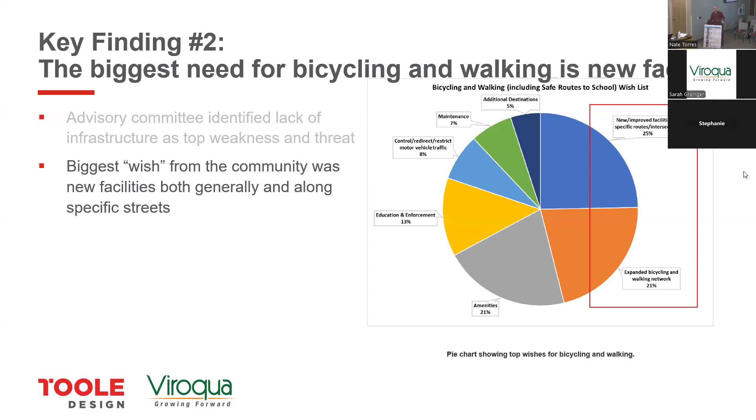At the end of the survey, we asked people if there's anything else they wanted to tell us about biking or walking. The top thing they told us is they want more facilities for biking and walking. It was just a theme you kept hearing again and again in the survey.

Out of all those conditions, earlier we saw that people thought Viroqua was great compared to other communities. That was the top rated condition. The worst rated condition was the location and number of bike racks for parking. Only about 10% of respondents said that was excellent or good in Viroqua. So there's definitely a need for new facilities, yes, but also for simple things like bike racks.

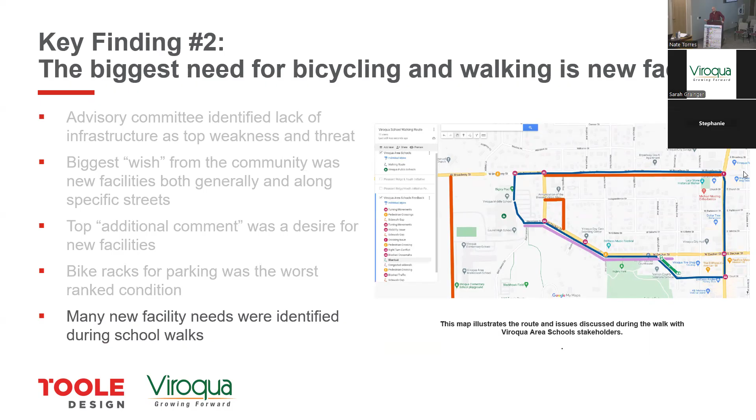When we did the school walks, these are our routes, and we heard a lot about that on the walks - just different needs of physical infrastructure that people wanted to see built. So that's number 2. Number 3, we're halfway through the key findings.

Just real quick, because sometimes this language throws me off - when you talk about a facility, can you share some examples of what a bike and pedestrian facility is? Examples would be sidewalks, trails, crosswalks, curb ramps, bike lanes. Yeah, because the word facility always throws me off - I think of facility as a building. Sure, in the transportation world, sometimes we do talk about it that way.

Even like the trails in the school areas that connect kids walking to different places, that would be part of it as well. Yeah, great - they're not always on public property necessarily. Sometimes a bike rack can be on private property if it's out of the right of way, or a school would be public property, but it's not always city property, I should have said.

The third key finding was that connections to schools, parks, and natural areas are the highest priorities for the community. A lot of times you'll hear, well, what destinations should we connect? We can't do it all - what's the most important? We asked people in the survey, and we had a map also, where people could put their points.

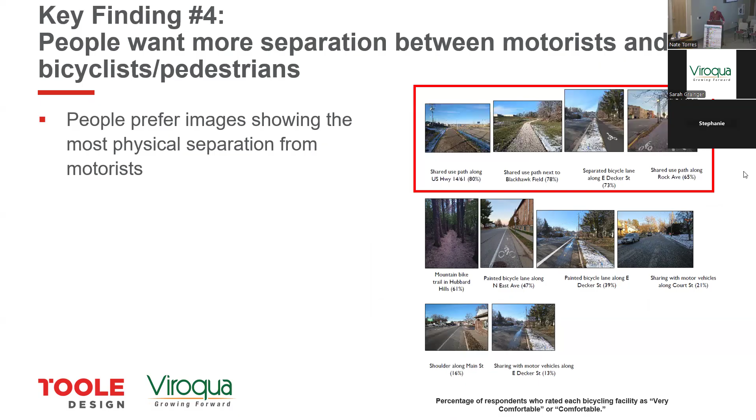The top streets and intersections for improvement are in locations with the highest amounts of traffic. We asked people: imagine you had a magic wand and could instantly change one street to make it better—which one would you select? Main Street was the top, probably not a surprise. The second one was Decker Street, and it quickly dropped off after that.

On the intersection side—since we asked people to tell us a street and then an intersection—the top intersection was Main and Decker, and the second highest was Main and Broadway.

The other thing that supports this idea that people want more separation, especially in busy locations, is that where the city worked with the DOT to make several changes on Main Street, we encouraged people to say what they liked or didn't like about those recent changes. These were outside the fairground, at Broadway, at Decker Street, and a couple down by the hospital. This was just one of them. Wherever there was more of a barrier or it was made more obvious where people should be, separating people, that's what people seemed to really like.

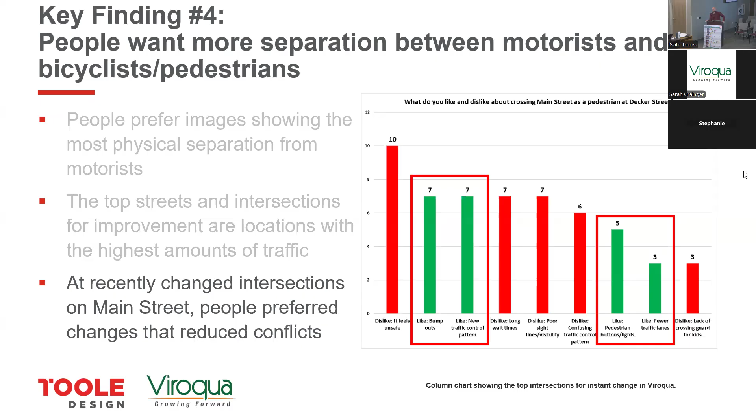Any comments or questions about what the public told us?

That sheet would have been like the map they had on the online survey—they could fill it out as a paper copy too, but those showed current conditions, and then people could mark them up.

So they were asked, like, if you were... yeah, it's there. That one's a tricky one because there's no sidewalk, and the bike lane is a very small one.

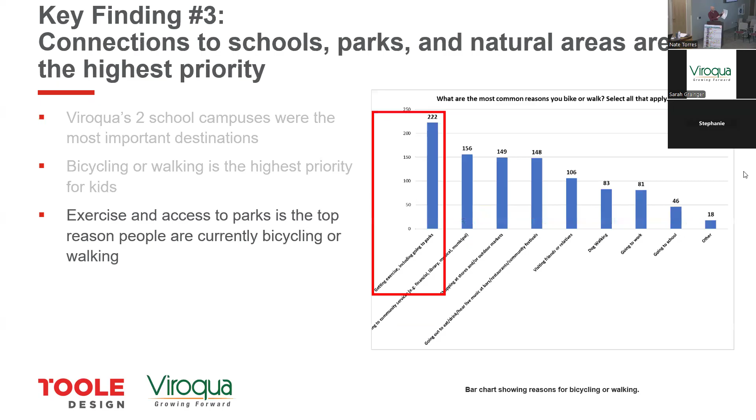These show existing facilities, and at the bottom, people could add their comments—that's how we got to some of those, like the destination map where we showed schools were the most popular. We got to it because we asked people to draw on the map and tell us that. If anyone else wants this, just let me know.

So then we started writing the plan based on what the public told us. This was a very early draft—something I created, so it doesn't look that great. For things that look better, I have someone who can help with design. This is just a Word document. We took this draft to the advisory committee and got feedback on it.

After we got feedback, we started fleshing out each of these different goals or strategies. There are three main goals. The first goal is to expand and better connect the network for biking and walking, and this one has three strategies. Then where you get into the details, those are the actions—we're going to walk through some of the actions here.

I'd encourage you to think of these like a menu of things the city can choose from—you're not going to do all this at once. Just because you adopt the plan doesn't mean you're executing all of them. It's really a list of things you can pick and choose from to address the issues the public was bringing up, and I'm sure these issues will come up as years go on, and probably already have.

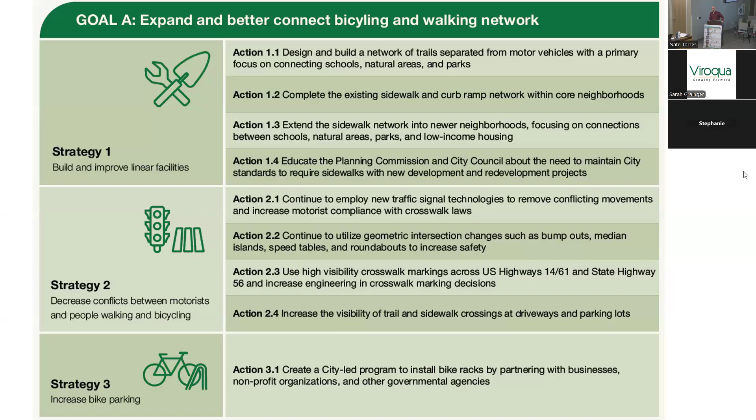So we're just going to walk through some of them, not all of them, probably about half of them. So the first one - I'm going to pull up my chart right here so I can read from these as we go through.

So the first one is to design and build a network of trails separated from motor vehicles. When we talk about separated trails, we mostly are talking about the images on the upper left, like out along Highway 14, and then the lower image. Communities sometimes need to get a little creative because you might only rebuild a street every 40 years, and that might be your only chance to put a trail next to it. But sometimes 40 years is a little long to wait, and people get anxious to see something happen quicker.

This image is from a smaller town, Northfield, Minnesota. It's bigger than Viroqua, but not that much bigger. What they recently did is they took one of their streets and saw-cut the pavement out, and added that concrete curb on the left-hand side. Then between the sidewalk and that new curb, that's a two-way bike lane. It's separated - some people would call it a trail, some would call it a bike lane, but it's the place for bicyclists to ride, and they're no longer mixing, and there's something more than a painted white line. So that's what we mean by a trail - it's got to have some sort of physical separation.

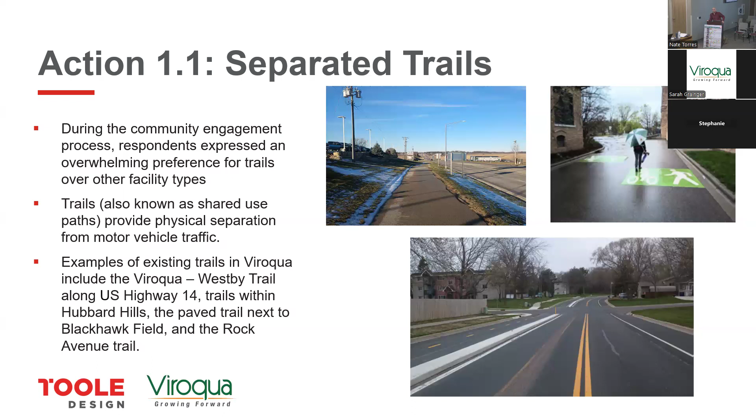Action 1.2 is to complete the existing sidewalk and curb ramp network within the core neighborhoods of Viroqua. With this one, we only had 30% of respondents rating the quality of the existing walking network as excellent or good - most people said it was either acceptable, not good, or bad. The city has already, over the years, put a lot of investment - property owners too - into building these sidewalks, but sometimes you'll be walking down a block and then get to a house and all of a sudden the sidewalk is gone. Finishing what's already started would really help improve the public's perception of that existing network and make sure it's working well.

Can you help me understand when you say core neighborhoods, what percentage of the city are we talking about with that? I know that might be a tough question - maybe that's not the right way to conceptualize it, but it looks like about 60%.

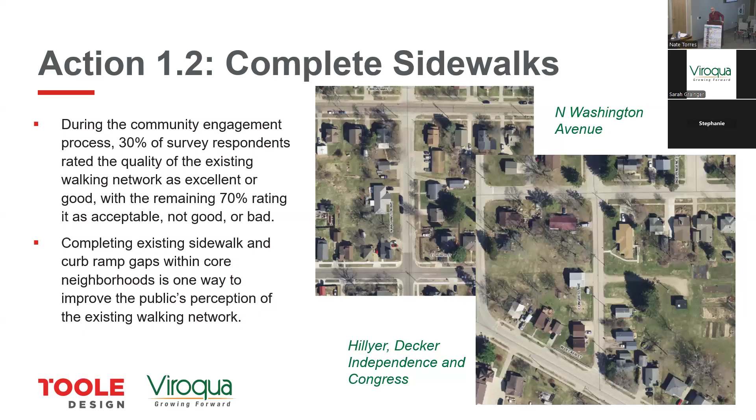The next action is to extend the sidewalk network into newer neighborhoods, but really focus on connections between schools, parks, and low-income housing or apartments. This one is a little more challenging because people already have trees up, they've got driveways, sometimes fences - they're very used to their yard going all the way out to the curb. So it can be challenging, which is why we're really trying to focus on those most important connections.

So if kids need to get, say for example, from the trailer court just north of the school down to the school, how do we get them there? Because that's a really important connection to be made.

There was one point on that - we did a little analysis of Census Bureau data. The Census Bureau asks people when they do the census how many vehicles they have in their house, and you all have about 200 households in Viroqua that don't have vehicles. So that's another reason why we're trying to focus on the apartments or the low-income housing - those might be more likely to be common places where people don't have a vehicle.

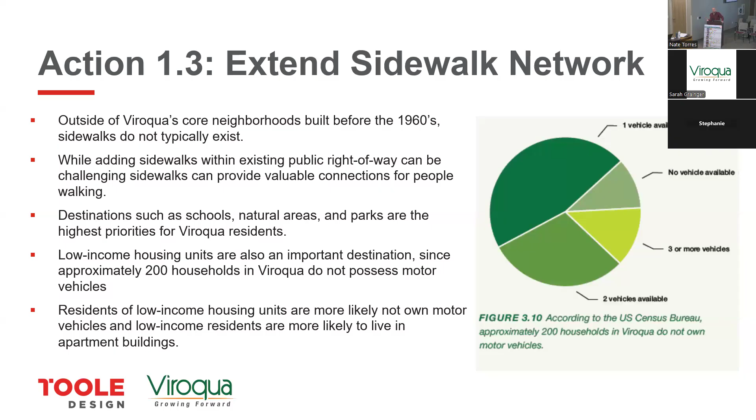So the next one here is 1.4. This is about educating the Planning Commission and Council about the need to maintain city standards to require sidewalks with new development and redevelopment projects.

Currently, when a new development goes in Viroqua, sidewalks are not required as long as an exception is made. That's the way it's written into the design guide. So the recommendation is to amend the city design and construction standards to not allow for that exception any longer.

For example, this image shows a retirement community that was just developed south of Eckhart Park by the nursing home, and it does not include sidewalks. I think Sarah's the one who, and maybe other people too, have gotten the complaint: why weren't sidewalks put in?

Actually, they were pretty adamant when they designed it that they did not want to put sidewalks in. Then 2 years after it was built, Bethel Home came to me and said we'd like to figure out a way to get a sidewalk here. People keep complaining that they have to walk on the street. So it's like the same people who didn't want to do it realized that people prefer to have something to walk on.

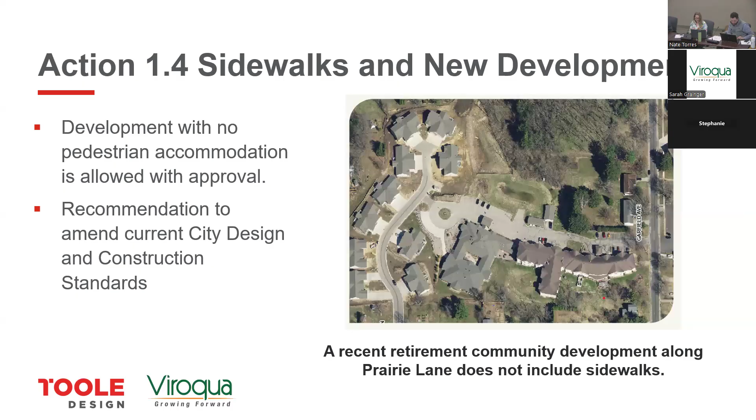Okay, so the next strategy was about building and improving linear facilities. The next one is to decrease conflicts between motorists and people walking and biking. The first action is 2.1: continue to employ new traffic signal technologies to remove conflicting movements and increase motorist compliance with crosswalk laws.

We just put a list here of the things described in the plan, different technologies that are out there. The city's already implementing some of these. Obviously Viroqua doesn't have a lot of stoplights, but when they are put in, or replaced because of their age, these are different things that can help reduce that conflict in ways that we weren't used to a decade or two ago.

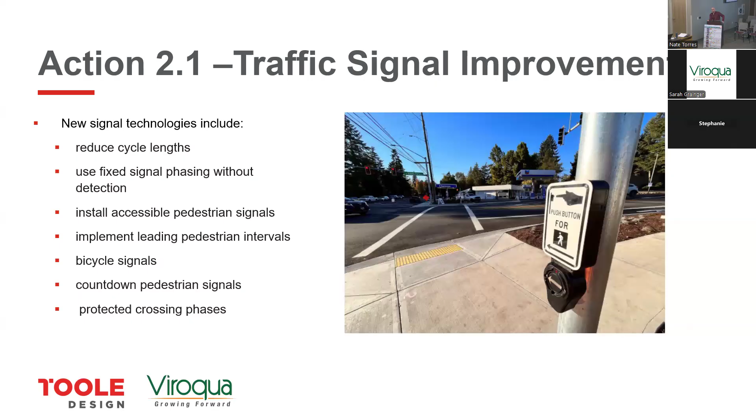The second action here is to continue to utilize geometric intersection changes. That basically means where are the curbs and what about the height of the pavement. You can make changes to the way intersections are built to change behavior when people are driving, walking, or biking. So we listed a few things at the top here.

And then at the bottom, two bullet points: it's very, very common that when people are speeding, people always jump to 'we should put stop signs up.' But that doesn't stop everyone - it doesn't stop the people who choose to run the stop sign.

So if you're really trying to bring more consistent speeds and not just rely on trust and signs, things like speed tables like this one can really slow people down, especially when there's some sort of conflict or a crosswalk. And then roundabouts - obviously we don't have any in Viroqua, but we're seeing them spread in Westby and La Crosse and just south of town.

A big concern we heard through the process was that roundabouts are going to make it less safe for pedestrians. But that's not what the data shows. It shows that severe crashes involving a severe injury to a pedestrian are reduced by about a quarter compared to an intersection with just a two-way stop control - where a four-way intersection has two approaches that stop and two that don't. A roundabout compared to that reduces those pedestrian severe injuries.

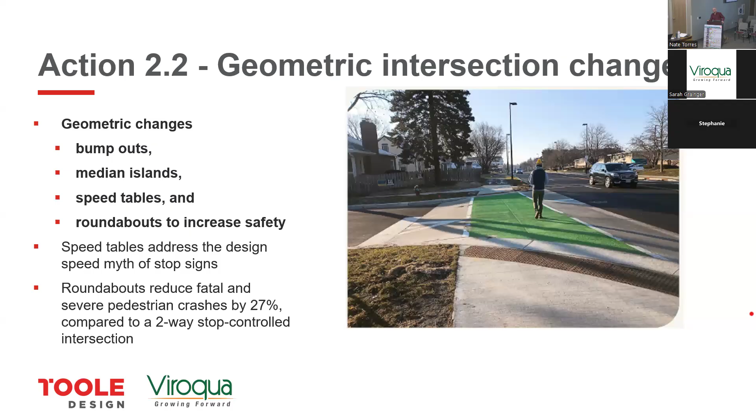The next two actions have to do with using high visibility crosswalk markings across the federal and state highways going through Viroqua, and increasing the visibility of trail and sidewalk crossings at driveways and parking lots. So these illustrate both. The upper photo is what we call a high visibility crosswalk marking - this is from the pedestrian's perspective, but from the perspective of driving down the road, these are much easier to see than if you just put two white lines.

They call these ladder crosswalks sometimes. That's why we're recommending in the plan that the busiest streets in Viroqua consistently get these highest visibility crosswalk markings. They haven't always been consistently used that way in the past, although there are several of these already out there on the state and federal highways.

At driveways, one of the complaints we hear sometimes - like the new Rock Avenue trail that was put in 5 or 10 years ago - is that you won't always see people biking on it. They're still biking in the street, but there are things you can do at driveways and street intersections to really raise the visibility and make people feel like it's a safe facility. Sometimes people don't want to get up there because of the driveways, and this is one way to handle that.

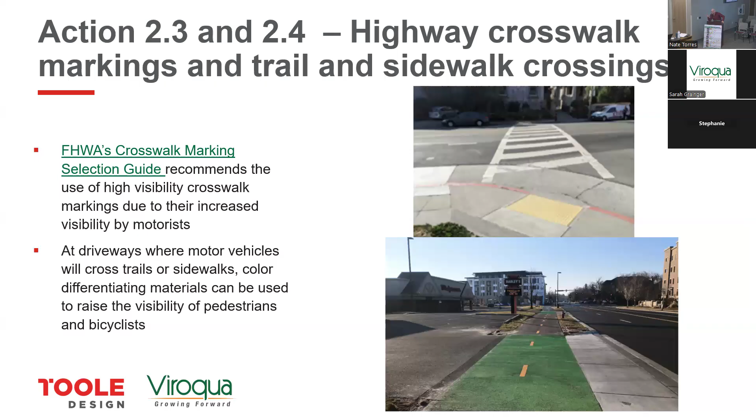And then we've got an action added about bike parking, like we talked about. I had to put this picture in because it's, I think, the only public bike rack, but nobody thinks it's a bike rack. I had to.

The reason we had it was when Nora was the Chamber Main Street Executive Director, she won it in a draw. They gave it to us, and we were doing the Rock Avenue project at the time, so we stuck it in there. I don't know if I've seen, maybe once, anybody put their bike on that rack. Everybody thinks it's like a really pretty sign, but it actually is a bike rack. The hospital and library have some stuff, but there's really not many bike racks around - those are pretty consistent though.

I used to live in Minneapolis-St. Paul, and every neighborhood had the loop. The reason it's made that way is because if you put your tire in a regular rack, all it takes is someone to come by and kick your bike and it bends your wheel. So they're made so you can rest your bike against it and lock it to the hoop, and you don't have any obstruction on your wheel. That's essentially the reason why they're like that.

They also make ones that just slip over like no-parking signs - essentially two hollow tubes and a circle that you can bolt to the post. So there are things you could do - you don't have to be in a bump out.

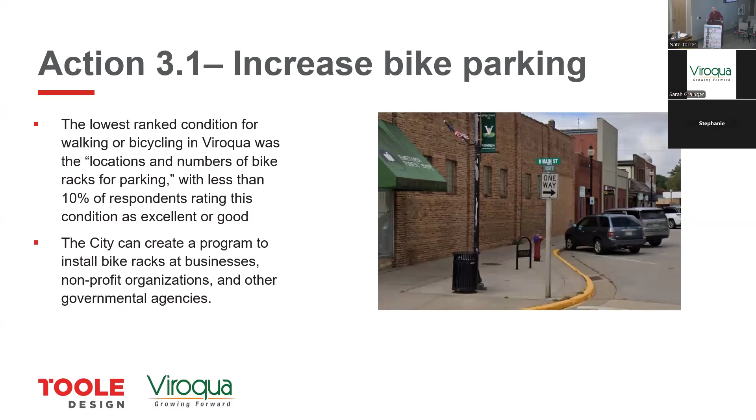So the second goal is around maintaining the walking and biking network. We've got two strategies: one is to improve winter maintenance, and the other is vegetation maintenance. So with winter maintenance...

Sometimes they also get into curb ramps, because people who live on corner lots are often the unlucky ones who have to deal with curb ramps, and who's responsible and where's the line between the city and the private property owner is often very confusing.

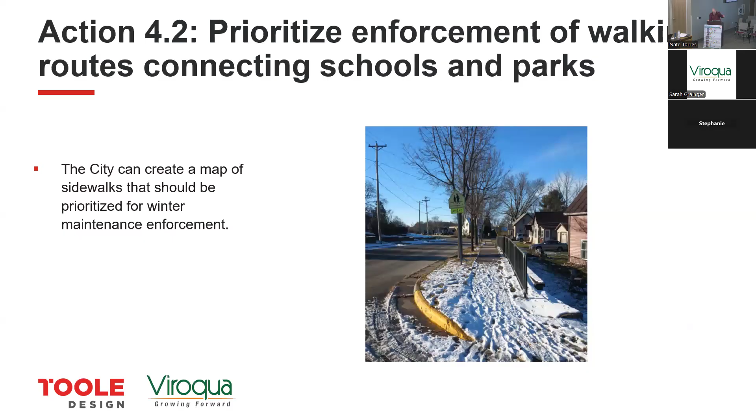Action 4.3 is about designing facilities to make winter maintenance easier. We've got three examples here. The first is storm catch basin placement.

These are images from Google showing two intersections right next to each other downtown. In the left image, if you look at the way the water flows on this street, it's coming from the east and taking a right going north across this pedestrian ramp. The catch basin is placed just upstream of where the water flows, which is great for pedestrians, because then that water won't pool in that low spot where the curb ramp comes down.

On the right hand side, across from the library, you've got the opposite, where that water is still flowing from the east and turning north, but the catch basin isn't placed upstream of the curb ramp, it's placed downstream. So all that water flows right across, which in a rainstorm is one thing, but in the winter when it starts freezing and melting, you get big pools that can create pretty big impediments.

If you just move where the catch basins are placed, or ask your engineers to be careful about that when putting their plans together for street reconstruction, that's helpful for the public and for maintenance staff as well. I actually showed this already to our main street engineering consultant, and now it's all he talks about when we look at storm sewers.

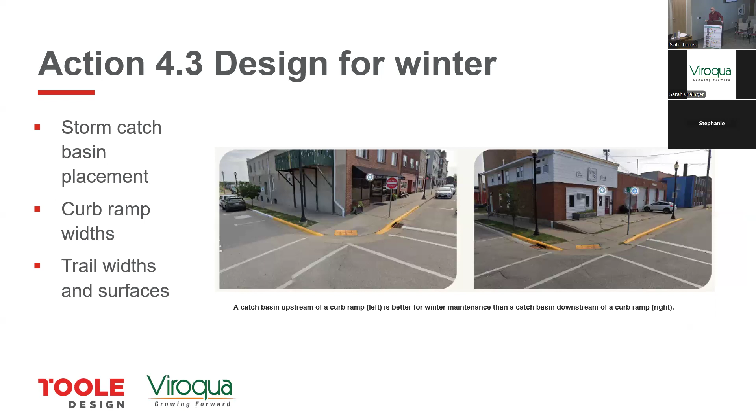Then the last one we're going to talk about here is exploring options for reduced private property owner responsibilities. This is mainly to increase service quality and increase compliance with the Americans with Disabilities Act.

This is very, very common. This is a picture I took next to my sister's house in Madison when I was visiting her in the winter, right across from a school. This property owner did pretty good, but they didn't go out into the street, nor did the street crews come back and clear that spot.

In the lower image, this is from Marquette, Michigan, when I was walking there, and they actually have municipal and business improvement district crews clearing some routes. They don't require property owners to clear any routes in the whole city. So only certain routes get cleared, and they're always cleared by municipal crews. The big advantage there is that you don't have those piles of snow at the corners, because you've got a little sidewalk, say a bobcat going along clearing the sidewalk.

But there's other ways to handle this, it's not always municipal crews. Sometimes there will be business improvement or neighborhood improvement districts that get started where property owners will tax themselves. You see this a lot up in Minnesota. They'll take some of that tax money and pool it together, and hire a contractor to do the sidewalk clearing in the winter.

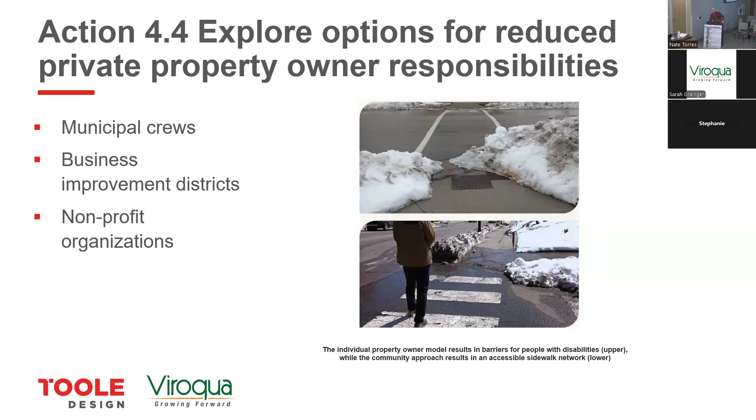Then the last one under goals and strategies is improving vegetation maintenance. Because I live around here, I'm familiar with the Boulevard ordinance and the controversy that brought about and how you all resolved that. But reading through the ordinance, it just covers boulevards, it doesn't cover private property owner vegetation coming out from the lot onto the sidewalk, like that left image.

So 60 inches is what the Americans with Disabilities Act requires for a clear width for someone going through, say with a scooter or a stroller. And then 80 inches vertical - so if I'm roughly 72 inches, it'd be eight more inches. That's the minimum there. So sometimes you'll walk along a sidewalk and hit your head because trees are growing down. We have some recommendations in the plan about how to amend the current ordinance to make it comply with the Americans with Disabilities Act.

And the image on the right, that's just from a community that created some educational material for the public to describe the new ordinance that they passed.

Yeah, we have variations on this, but not explicitly all of this. I actually realized that one of the things I thought was in here was specific to only certain situations - what was it, like corners or intersections? Yeah, 96 inches. So there's 60 inches in the center of the sidewalk. Is that going to get changed in the ordinances or what?

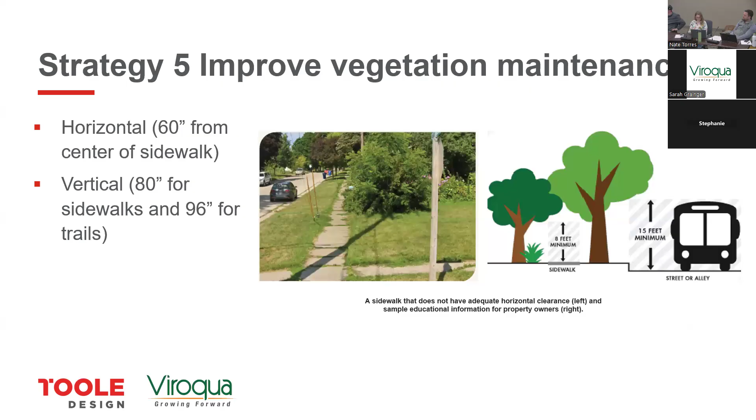It's a tricky one. So that's all chapter 3 in the plan. It's pretty meaty, there's a lot of text but a lot of images, and it's organized in that way of goals, strategies, and actions that you can choose from as a menu.

Chapter 4 is more about where are you going to build new stuff. And by new stuff, we mean sidewalks and trails with a couple exceptions. We took an early draft of this map last May to the advisory committee to get their feedback. The yellowish brown lines, where there are more of them, those are existing sidewalks. And the orange, more bright ones, those are ones that we were recommending to that committee last May.

So you can see how in the older neighborhoods, we're just trying to complete where there are gaps, but in the newer neighborhoods, we're not trying to put sidewalks on every street because that will not go well. It's difficult to do this with the public because you're taking something away and giving them more responsibility at the same time. So we tried to be very careful.

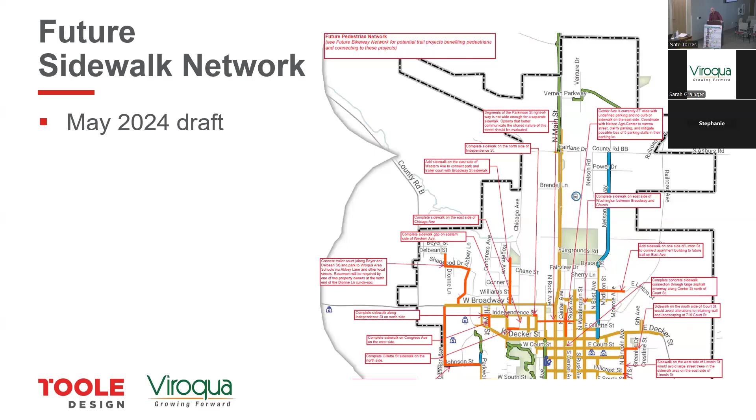If you go to the next slide, Sarah, it's a little harder to see at this scale, but the dotted orange lines are the ones that we're recommending. There are 26 projects, for the most part linear projects or segments, 21 of them out of the 26, but 5 of them are intersections, and those are all near both school campuses.

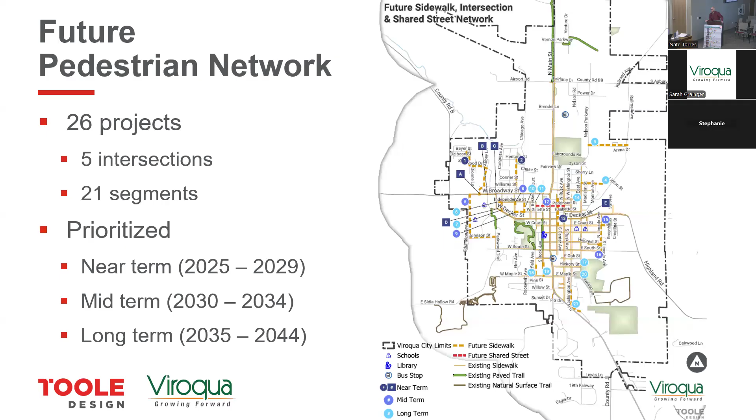And then they're also all prioritized. So if you're just looking at the colorful purple and blue dots, each one of those is a project. There should be 26 of those, although 5 of them are squares, and those are the intersections. The highest priority ones, more near-term ones, are in the darkest purple and darkest blue color. The medium priority ones are a mid-purple color, and the longer-term projects are in a light blue color. They might not all get completed within those years on the slide, but just to figure out what you would chew off first or what would be the biggest priority, that's why we put that on the map like that.

And like I said, those are mostly sidewalks, but an exception would be this street right here. There's just really no way to put a sidewalk and a street next to each other, because of not only driveways and the width of the street, but buildings. You'll get up closer to Main Street and you'll practically hit a garage foundation and things like that.

So in the plan, a little bit earlier, back in that goals and strategies section where we talk about filling in the sidewalk network, we show a few examples of streets that have been built to make it look like walking is something you should expect on this street, and drivers can go down it, but it really slows them down visually. So just to describe this image, what I'm trying to describe here, in one example...

They left the asphalt in the middle of the street, but on either side they didn't widen the street. They just put a very narrow strip of asphalt in the middle, and they put concrete on each side, like 2 feet wide of concrete, and it just really narrows it down. It almost looks like a driveway in the image, but it's totally fine for cars to go down it.

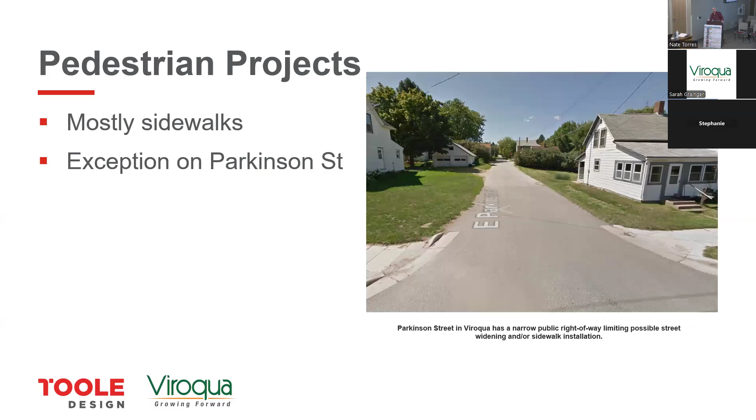But this is not going to be ever a high traffic street. There's only a couple of houses here. It's so narrow, it probably discourages a lot of people. There's no stoplight to get out there on the main street. So it's just kind of the way to design it that could make it fill in this gap in the network, because when you look back at the map, there are no sidewalks running east and west for at least 4 blocks between Broadway and Decker. So that's the challenge, and that's why we put this one in there.

And it's a tricky situation, that one.

On the bike side, we have 22 projects. Similarly, they're also prioritized. The thing I'd point out about this map is, first of all, that we're almost exclusively focusing on paved trails, because we heard people wanted that separation. We're not recommending in the future that bike lanes be added - by bike lanes, I mean the standard ones where you just have a white line, like on Northeast Avenue, Nelson Parkway, things like that. We're really recommending more of a separation between motorists and people biking.

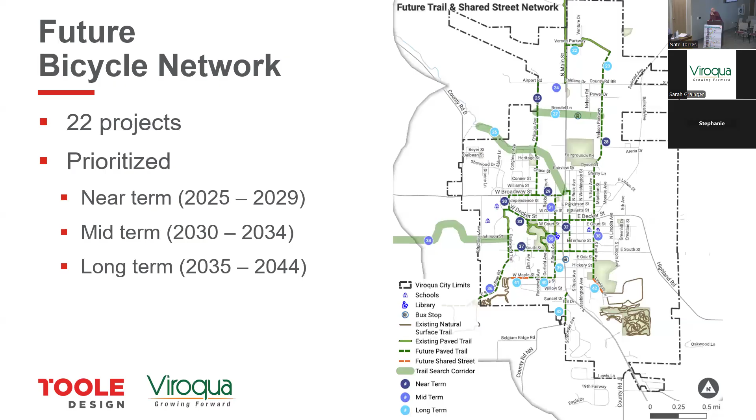And pedestrians oftentimes use these trails too, where there's no sidewalk. So there's dotted green lines on this map. There are some situations though where we weren't quite sure where the trail should go, and so we created what we called these trail search corridors.

So say like where you see the number 34, there's also a line with a hump in the middle going out toward the west, west of the school. This is the map - we realized we edited this during the map, it has a few changes to it in the plan.

But there are multiple, and we actually added a few more based on input from the advisory committee - you'll see those trail search corridors in the plan. They're not intended to be a solid line on the map where we know exactly where it should go. There needs to be some exploration that happens.

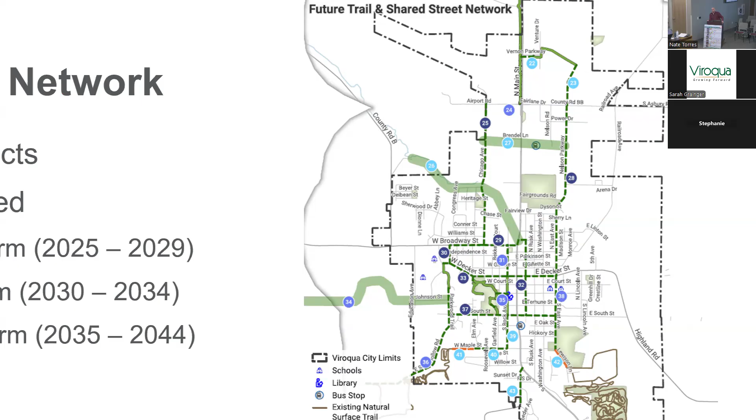But there are several where we do have a good idea of where they should go, say along West Decker Street, South Street, and then pretty much staying off of Main Street and doing Rusk Avenue and Center Avenue, one on each side, at least in the core of town. But there are other ones around as well that we're more certain about in the way the recommendations are written.

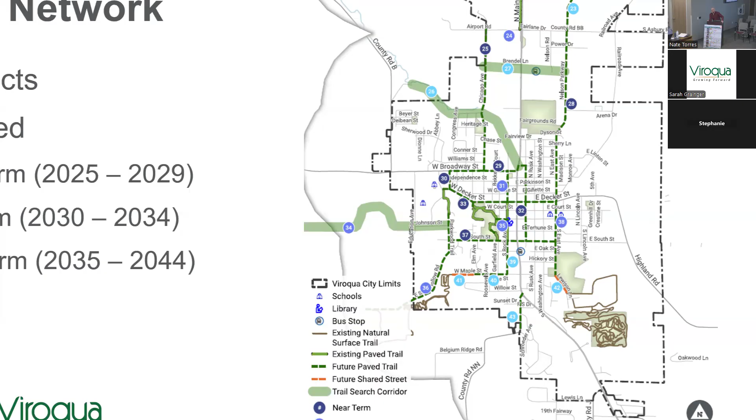Oh, darn it. Sorry. It's okay.

What about sharrows? Is that a possibility as well? It is, and sometimes people will use a sharrow instead of that, though sharrows have definitely fallen off. Sharrows are just a bike symbol on the pavement with two arrows above them, like a chevron, kind of a merge symbol. It's saying yes, this is a road, but there possibly would be bike traffic, and it also encourages you to share the road with the bikes. They do tend to be pretty small when you're going down a road.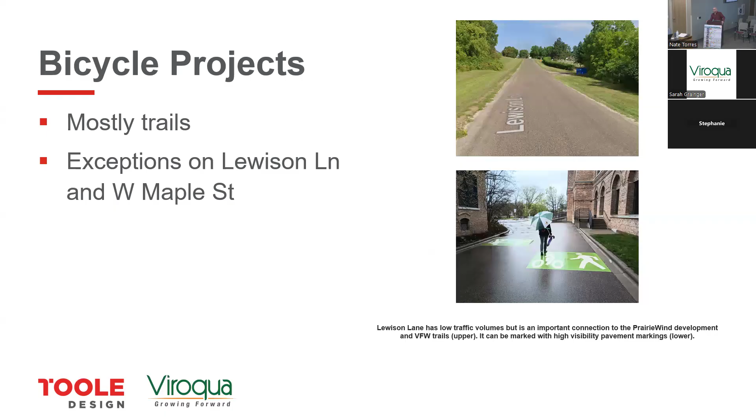And then how did we decide those priorities? If you're wondering about that, we had a list of 8 factors. We worked on this with the advisory committee, and they weighted the factors. We weighted schools and busy roads the highest, and cost and connections to natural areas and parks the lowest. That doesn't mean those things aren't important — it's just how we did the weighting.

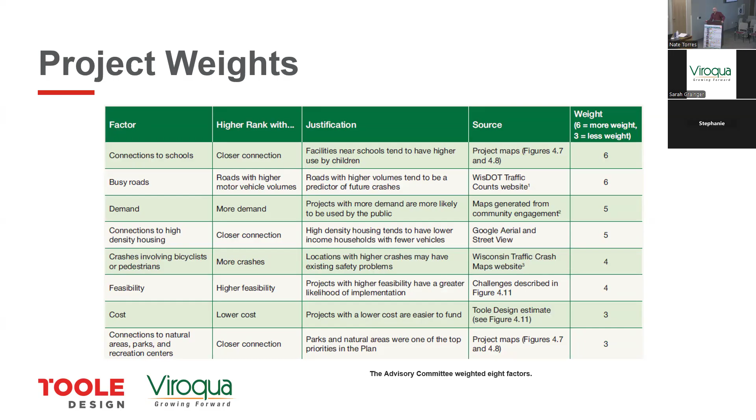On the next slide, we took each project — say, for example, South Street, for the trail project. Here's 4 out of the 20-some trail projects. We scored South Street on connections to schools; I think that got a score of 3, and you could get 1, 2, or 3, with 3 being highest. Because that factor had a weight of 6, we multiplied it by 3 to get a score of 18 for South Street's connections to schools.

We did that for every project across all 8 factors, then added the scores up, and that's how we came up with the highest priority projects for trails. So these are 4 of the top priorities for trails: Broadway, Chicago, and Decker as well.

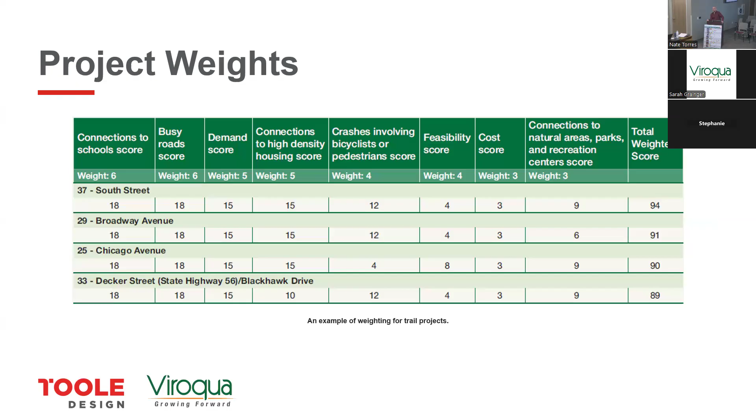Oh no, I'm done. No, keep going, it's okay.

For each project, we also wrote some high-level details. If you're curious how we're going to build a trail along South Street and make that happen, we actually did some thinking about it — we went down Street View and noted the challenges that would have to be overcome, but also opportunities, like putting it on the north side because it connects to Eckhart Park and there are fewer houses there, things like that.

The total miles recommended for new facilities are 15 total, and you can see how that's split between trails, sidewalks, and shared streets. Most of what we're recommending is trails at 11 miles, with sidewalks at roughly 4.

The other part of the plan is that the city did a Safe Routes to School plan back in 2011 with Westby, and we updated that 2011 plan with what we call an addendum. That's to make it easier to apply for grants, because oftentimes they'll ask for a Safe Routes to School plan, so we wanted to make sure you had that to help bring in outside money to fund some of this, since it's expensive — you're going to need outside help, especially for the bigger projects.

A lot of what was in that older plan had changed — some schools that were listed don't currently exist anymore — so we wanted to make sure it was accurate.